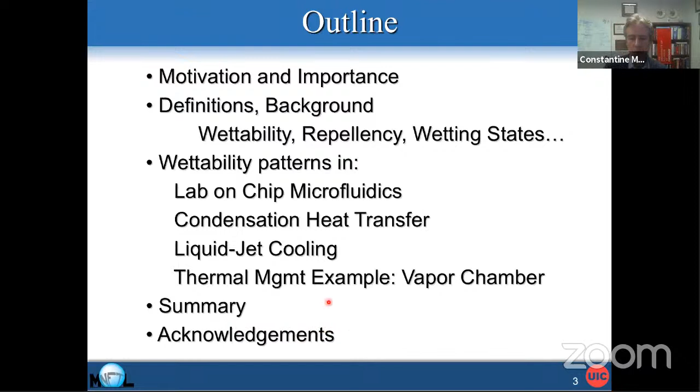And just to give you the background here about the effect of wettability, which is really the affinity of a solid surface to be wetted or covered by a fluid, is indicated here. This affinity is quantified in terms of the contact angle, which you see here.

If you have a small volume of fluid and you let it sit, this is the sessile contact angle, we call it. The equilibrium angle formed at the triple phase contact line - liquid, gas, and solid - designates the wettability of the surface. Small values of theta indicate high wettability. Large values of theta, in the sense that you have a ball, a basketball, let's say, sitting on top of the surface, indicate low wettability.

So for low values of theta, or high wettability, when you have a small amount of fluid, a droplet in that case, impact on the surface, the outcome is this. If you go to, let's say, neutral wettability, where theta is about 90 degrees, and do the same thing with nothing else changed, the same liquid, in this case water...

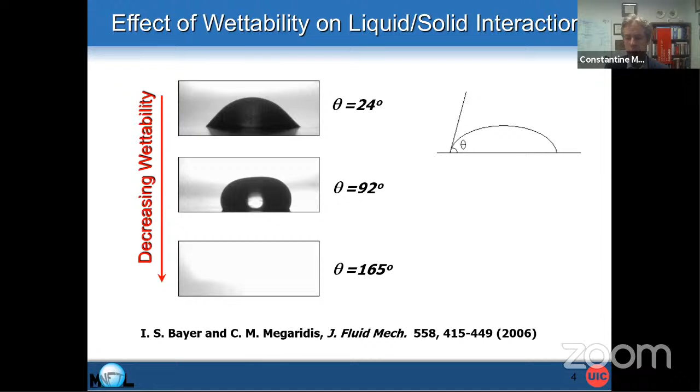So let's see how you can use this different behavior of liquids when they encounter solids to do certain processes and create outcomes that are useful in microfluidics or energy applications and so on.

So I'm going to talk about open surface microfluidics. This is our area of expertise here, and I understand a lot of that is also happening at IIT Madras in your group. We're going to concentrate particularly on pumpless rapid fluid transport.

Pumpless in the sense that it's not gravity driven, and rapid in the sense that it's not centimeters a second, but rather of the order of tens of centimeters a second, up to half a meter a second. These are almost like convective velocities caused by manipulating wettability on a surface.

Now, when you look at how a small droplet sets itself when we place it at the start of a wedge track—in this case a triangular wedge track—we're looking down on this droplet, so this is a top view. The dashed lines indicate the wettable domain, and everything else outside is a non-wettable domain.

The droplet itself, before it actually assumes this shape, is on the order of about 2.5 millimeters, which is below the capillary length of water. Why is that important? Well, when we have volumes with characteristic scales below the capillary length, gravity is not at play, or at least it's not important—it may be present, but not important.

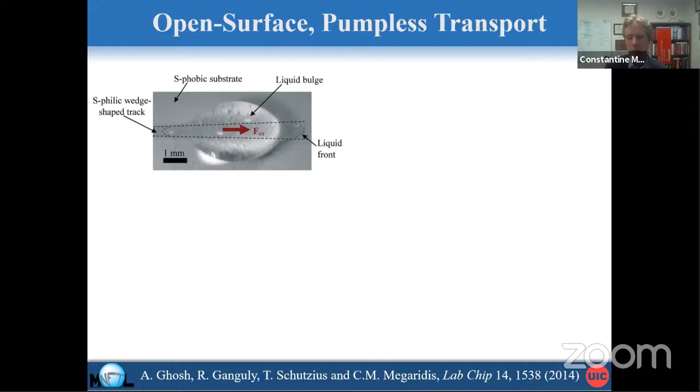So as we release this droplet at the narrow end, this droplet is in fact experiencing a force that is pushing it from the narrow to the wide end. I'll go into specifically why that is.

When you look from the top, you have these contact line forces, and because the droplet itself is spilling over and forming a cross section that looks like this, because of the shape, you have a composite force that in fact pushes the droplet from the narrow to the wide end.

And of course, when this configuration—this cross section—becomes that, things are slowing down because the forces are in the opposite direction, and then hemi-wicking also becomes important. So overall, the droplet deposited on a wedge track that is wettable and surrounded by a non-wettable domain is being pushed from the narrow to the wide end.

And with this analysis, kind of a back-of-the-envelope type of analysis, when you look at how this pressure gradient along X—this is the direction of propagation—it varies with the surface tension of the liquid, the average contact angle formed by the fluid spilling over at that contrast area, the wettability contrast area. Alpha is the angle of the wedge, and delta, depending on exactly where—at what X you're at—is the width of this track.

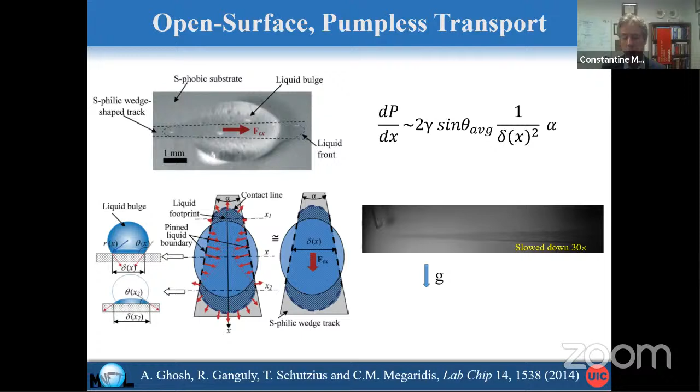So these are not velocities, hemi-wicking velocities through, let's say, a paper towel or a porous medium and so on. Now what can you do with something like that? Well, this is a depiction of a wedge that now is on an inclined path.

This wedge is depicted when you release it at the narrow end. Because of this force, it will be going upward, you'll see that in a minute. In this particular configuration, you bring the droplets, after releasing them at the low end, all the way up to that pad.

Of course, you're starting with energy that comes from the spherical shape and surface tension of the droplet, like a membrane of a balloon that squeezes the interior contents. As you allow it a way out, along this track, the liquid is pushing itself up because of that original excess energy. Eventually, when it becomes flat, that energy has been converted to potential energy, right? You went from here to here. So there's a limit to how long you can raise those.

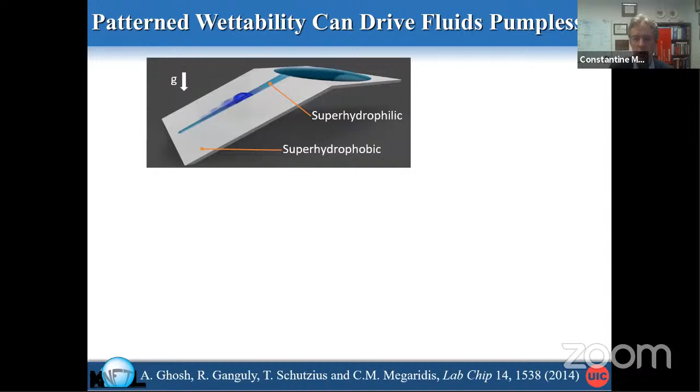If you do this simple calculation with a 2 millimeter diameter, again below the capillary length, you can calculate that it can rise up because of this surface energy to about 15 millimeters, because of other losses, friction losses and so on. But the theoretical limit itself is actually 22 millimeters, about 2 centimeters, but of course you can never achieve that.

Now when you implement that in practice, on the left, as you see in this panel, you have the syringe that dispenses colored water, dispensed at one point of this inclined ramp that you see here.

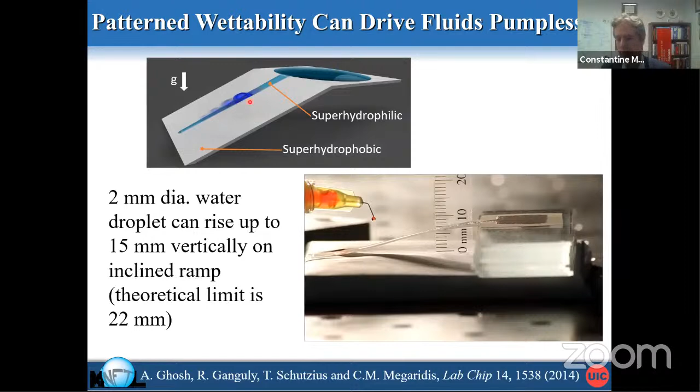Look what happens when we actually start dispensing droplets one at a time. They will start rising and go up here on the pad. This is what you see here, in real time. This is again red dyed water, and you can see how it rises against gravity. Gravity is pushing down, and you can see how the droplet falls with gravity.

This gravity contribution, by the way, is very small, just a few percent of the energy compared to the Laplace pressure in the droplet. And you see how eventually you can get tens of those droplets up on this pad.

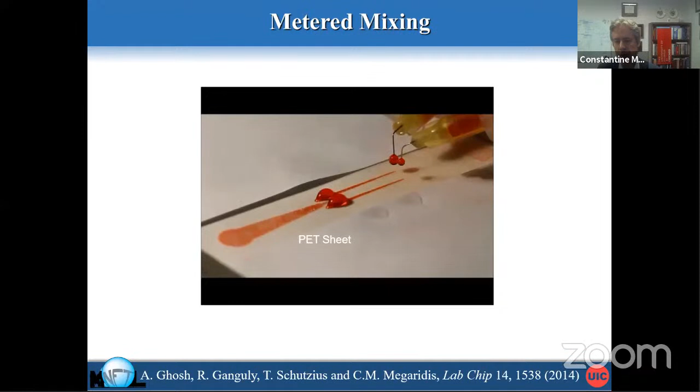So let's see then, in that particular case, what happens when you actually do this in real time. You see the droplets becoming large, they eventually merge together, and it's always happening the same way.

And you can see, you can repeat this many times. Gravity is normal to the paper, to the plastic sheet right here, and you see a tremendous amount of fluid that is actually trapped by the wettability confinement.

As we move on, I want to show you a slide that looks busy in the beginning, but I'll orient you. This is the schematic of what is depicted here. We have two wedges, A and B. They're a little lighter in color than the surrounding area, and this is the wettable area. Both A and B are wettable, and they extend to the beginning of C, which is this right here—that third staggered track. The interesting part I want you to pay attention to is the presence of this hydrophobic island, which is this one right here. That hydrophobic island does not want to be wetted by the liquid.

These are, by the way, two different liquids, both aqueous. They're salts that react together, and when they react, they create a dark color that shows you the degree of mixing. The darker the blackness of the fluid after mixing, the better the mixing. So this is qualitatively how we evaluate the degree of mixing. These, by the way, are millimeters, so this is a centimeter. You're looking at something on the order of a few centimeters.

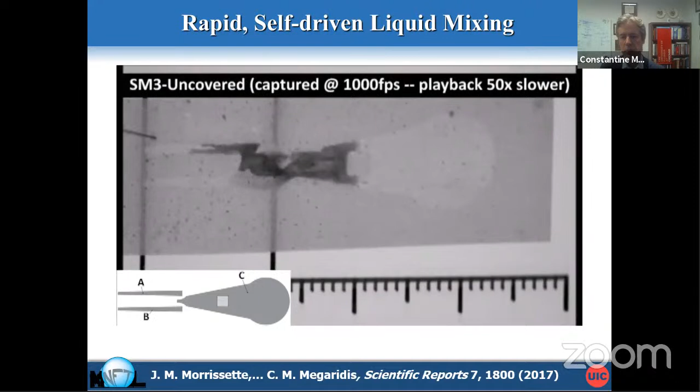Now as I play this video, I want to point your attention to the left. You see the needle at the top left, and when the droplets are released, they react. You have the mixing, and over the island you see how the drying occurs. This is drying because the surface repels the liquid. I'll play it again so you'll see some pumping action behind the island—this wake action actually improves the mixing of the two liquids, and the mixing time is far shorter than when you had diffusion alone.

So you get the idea, and then you can do quite fancy things. In this case, let's say you have an overpass in this fluid—both of them are water droplets. We're going to have a path kept up by a block that goes over the path the green droplet is going through. As I play it, these are millimeters—this is one centimeter, two centimeters, and so on. You'll see an overpass where the red liquid goes over and the green liquid goes under.

And here it is, in real time. You bring the green all the way closer to the viewer, let's say, and the red all the way from the right to the left. So you can do either straight paths or curved paths.

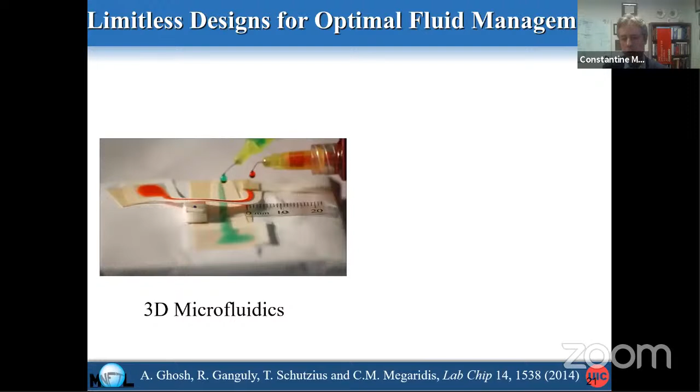Or 3D microfluidic tracks and so on, but you can also do spiral paths. In that case, the spiral is on the order of about 20 centimeters or so. When you dispense a droplet right after the start, you can see that flash—that's the impact of the droplet—and you see how that liquid advances.

So there are a lot of things you can do and manipulate in microfluidics, the kind of stuff you may be doing for building devices—devices that aren't applied to just one type of substrate, but many different substrates. It can be metal, it can be paper, it can be plastic, it can be glass.

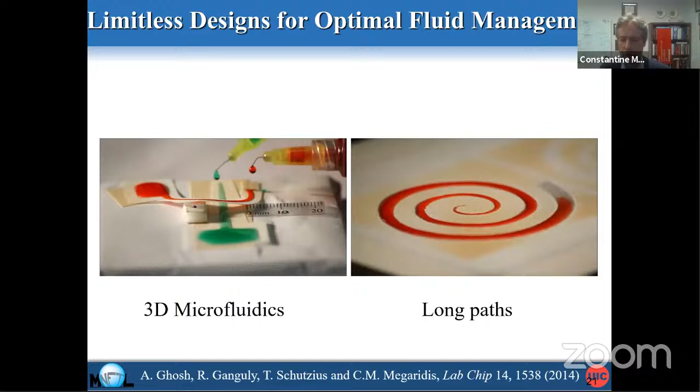Now as we look at what you can do with this type of configuration when you have non-aqueous liquids—let's say you have an oil—you need, of course, to create repellency to the oil, and we all know that's not easy at all. We have a formulation we created in collaboration with the US Air Force at Edwards Air Force Base. The chemists there involve silicon cage compounds, POSS compounds. It's not critical at this point how we make them, but what's important is that you can also have non-aqueous liquids with lower surface tensions that undergo the same type of movement.

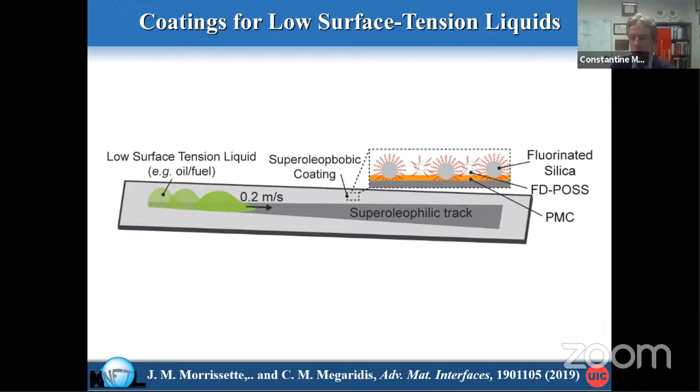In that particular example I'm showing you, you'll see different bands of liquids starting from the top where you have water. The next one is a hydrocarbon, maybe kerosene, all the way down to decane, where the surface tension is 23.8 dynes per centimeter.

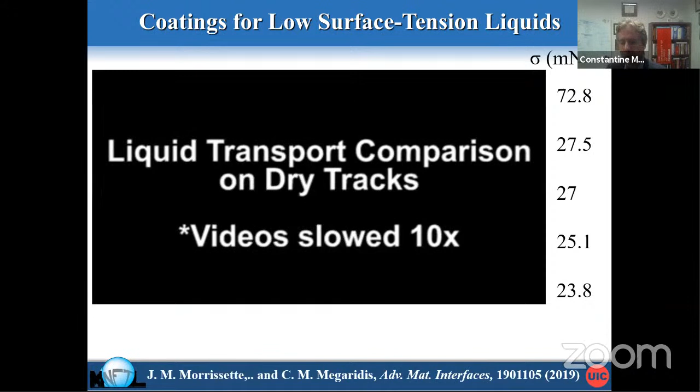As you go to a lower surface tension, it becomes a lot more difficult to repel those liquids. But I'll show you the outcome of this published study, where you have these tracks, slowed down by 10x, from water to hexadecane, kerosene, and dodecane. You see the droplets on the left, and how the front progresses to the right, with velocities that are quite significant—in this case up to tens of centimeters a second.

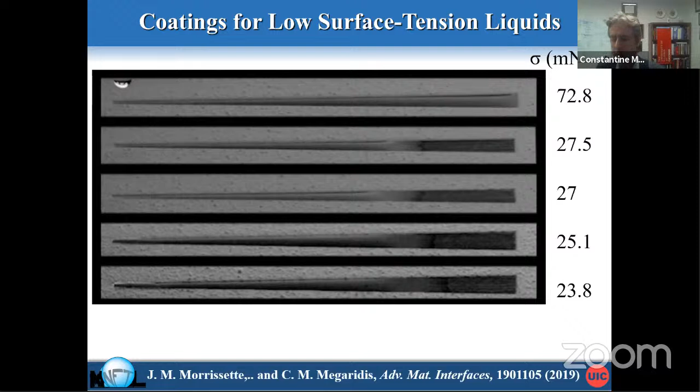We've recently also been able to create something similar with octane, which is in the very low 20s for surface tension. To the best of our knowledge, with this type of sprayed coatings and wettability patterns, octane has not been done so far. We're not talking about surfaces repelled with highly sophisticated, lithographically made, expensive surfaces—we're talking about something you can spray and pattern.

Now, as we look at the physics of this, if you look at the advancing rate of the fluid and how it progresses as a function of time, this is versus viscosity of the fluid, which we tested with glycerol and water solutions. You see that the rates, of course, are not the same.

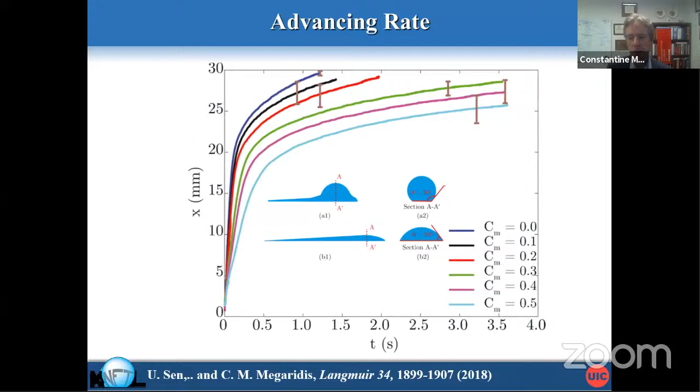However, if you look at what is driving this type of physics and movement, and look at non-dimensionalization—you non-dimensionalize the front, the length where the front of the droplet is, with the total length of the track, and then scale the time with respect to the viscosity and surface tension of the fluid. Interestingly, density does not come into the picture here, possibly because the density ranges we looked at were not that wide. But what is important is that you have three distinct regimes.

You have a hemi-wicking regime right here, where Laplace pressure has not yet kicked in—this is the area that is blown up here. All these curves collapse into one. Then you have a second area where Laplace pressure is actually countered and balanced by the viscous forces, and that's why you have dx/dt constant—the velocity is constant. Then you have a third regime where dissipation and viscous forces take over, and dx/dt is much, much lower. So the flow slows down here.

Nonetheless, you're able to see that there is a scaling law you can use, with the exception of density—as I said, the density variations we used were not very large, on the order of about 20 or 30%. But if you go to a ratio of 2 or 3, things may change. Nonetheless, the scaling law allows you, for fluids with known viscosity and surface tension in this type of system, to predict how a droplet would behave on a wedge, given its surface tension, viscosity, and the length of the track.

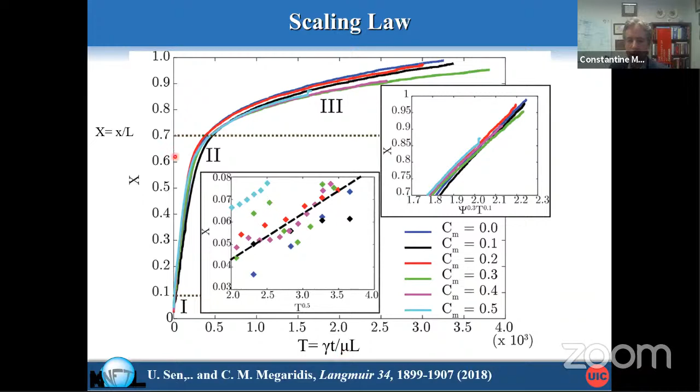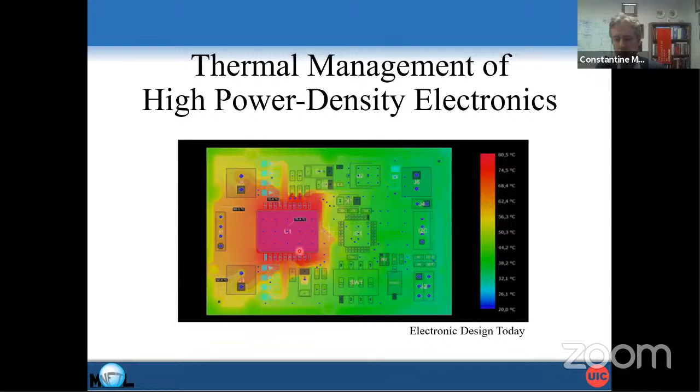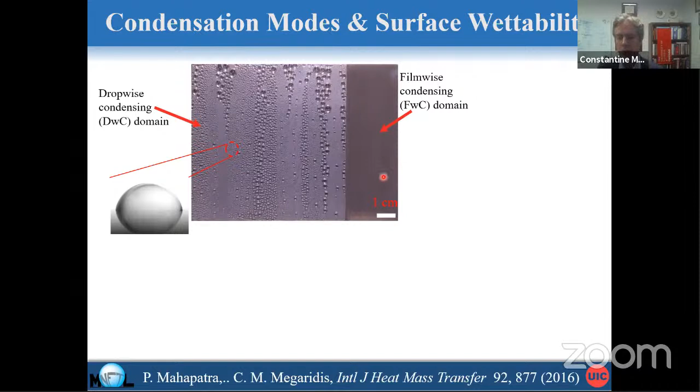Here we enlist the physics and thermodynamics of condensation modes. You have dropwise condensation, which is very efficient in heat transfer. Then you have film-wise condensation, which is not efficient, but is good at allowing you to remove the condensate. You see how the liquid deforms in the dropwise condensation configuration versus film-wise. Because the film covers the cooled wall, it insulates what's happening on the wall from the ambient, which slows things down.

That's why when you compare this to this, the heat transfer coefficient for dropwise condensation is far better than filmwise condensation. So you want to be able to have efficient dropwise condensation.

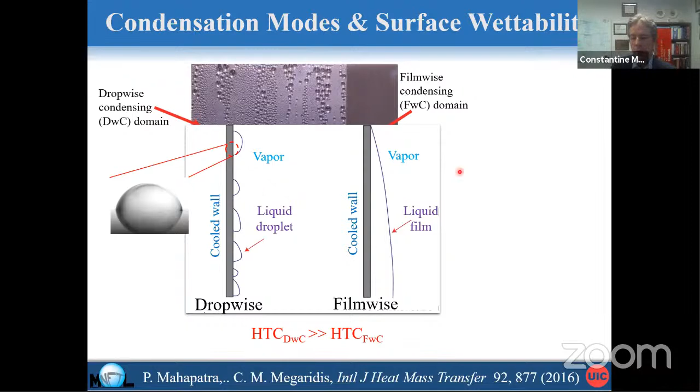When you look at how one can achieve that, it turns out that when you remove the condensate droplets at lower size, so you don't allow them to become very big, the dropwise condensation heat transfer becomes more efficient. I display here a series of bands of dropwise and filmwise condensation domains. We have dropwise condensation here, and this is a continuous film of this condensate, water in this case, indicated here.

By manipulating and tuning these bands, not in real time but in advance, you're able to allow these droplets to become only as large as the width of the dropwise condensation domains. When you do that, these droplets eventually bridge and get sucked into these paths right here.

That's what I'm showing you in these two videos on the right, where you have the dropwise condensation and the filmwise condensation. Let me show you again with the laser pointer: dropwise condensation, filmwise condensation. Filmwise is right here, dropwise is right there. I'll play that in a minute.

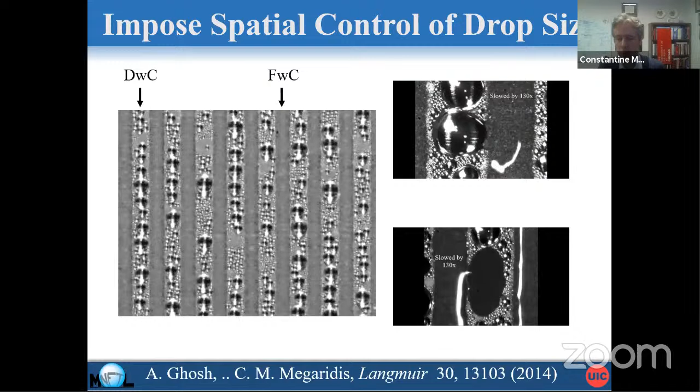As we go on, this is work that Dr. Mahapatra actually did in the lab here when he was around.

You're looking at these rake kind of patterns. The dark domains are the domains of high wettability, and then when droplets in the less fluidic domains, which are the dropwise domains, get big enough, they get sucked in by these wedges, and then drawn into these veins and moved to another part where you don't have to worry about interfering with the dropwise condensation.

This is a sequence, slowed down, showing a forced situation where we leave a droplet at the end of one of those wedges, and you see how it's directed towards the wide part of the wedge and then into the main vein that you're looking at here.

So the strategy here is to use dropwise condensation and filmwise condensation domains to enhance heat transfer. Of course you have to optimize, because one works for you in terms of drainage - the filmwise condensation facilitates drainage - but filmwise condensation works against you for heat transfer coefficient, while dropwise condensation works for you.

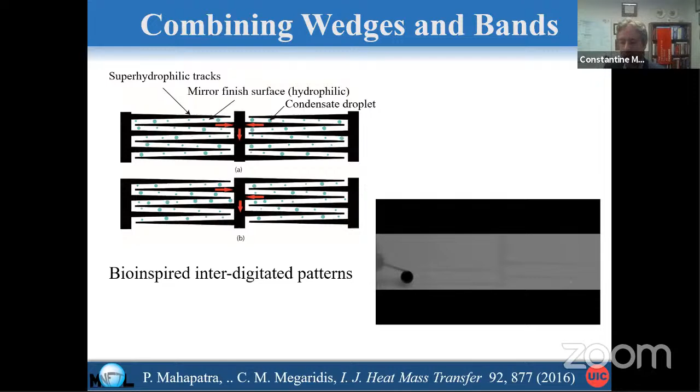In this particular case, you see this implemented in a real application, where you see popping events with these droplets. When they become large enough, they eventually get sucked in and go down these fluid-filled veins, and eventually the condensate drops from the bottom.

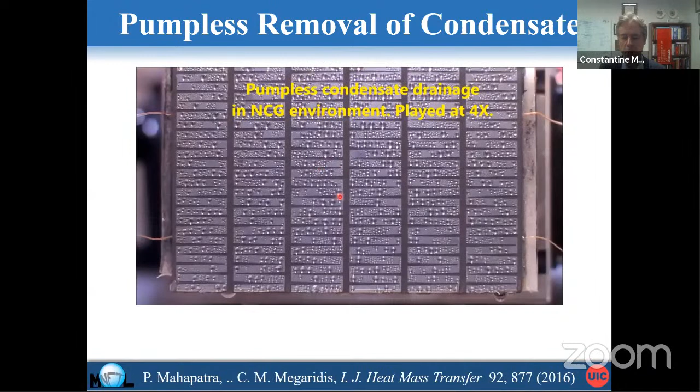This is in the presence of non-condensable gases. If you had a pure steam environment instead, these improvements would be much higher.

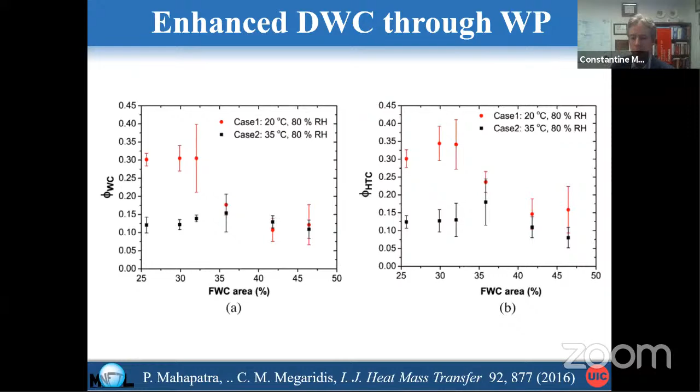Liquid jet cooling, that's the third application I'm going to talk to you about.

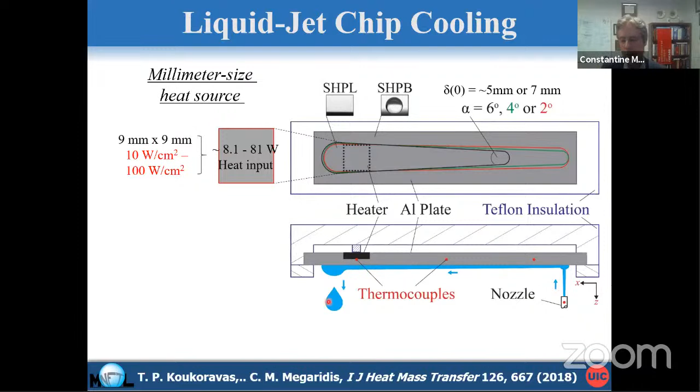So how is that happening? Well, the incoming flow is coming from right to left. This is the hot domain right here, and you see as more and more fluid comes in, eventually this accumulates and drips down. When you do this, I'll show you the video here as it's seen from the side.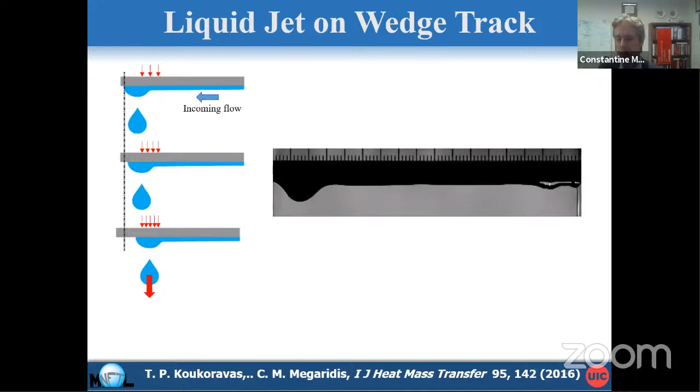This is where the jet is striking, the jet is moving from right to left. Again, if you looked at it from the bottom up, you will see the triangular path. This is a narrow path that gets wider and wider, and as you get more and more liquid here, eventually it drips off. The hot domain is right here, and that hot domain is kept cool by the fact that this liquid film is driving over it.

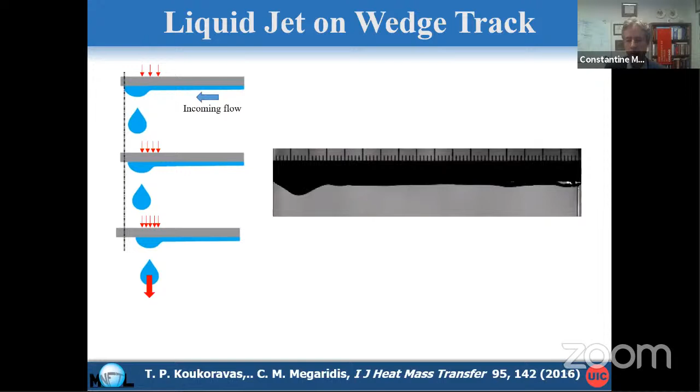Now there are interesting things here related to a single versus multiple of those tracks. When you look at the height of this film and the width of that film as it propagates from the narrow to the wide end, you can do simple heat transfer manipulations. The heat transfer depends on Reynolds number and Prandtl number, and then the width of the film thickness, and then a constant. And then you, in fact, have 2 possibilities: a single track versus multiple tracks.

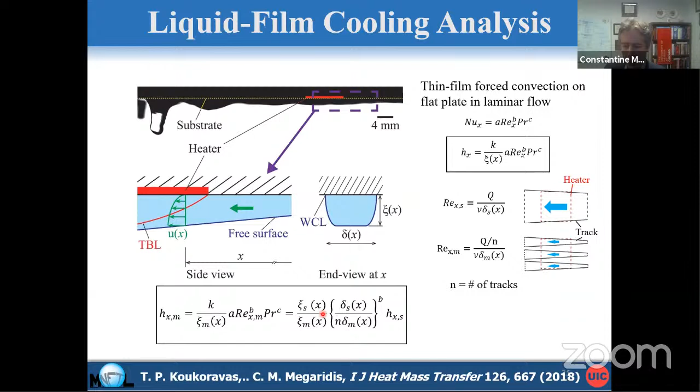I'll show them in a minute. The multiple track heat transfer coefficient is compared to the single track heat transfer coefficient, but there's also this multiplicative factor that can be quite a bit larger than 1. So if you play your cards right, this is the width of the single track, for example, and how it compares to the number of tracks multiplied by the width of the multiple tracks.

So these are smaller tracks, then this ratio, you can make it larger because remember, this is the width of the single track, and this is n times the width of multiple tracks, and this product here is generally smaller than that. So this is larger than 1, and because of that exponent, this is a larger than 1 factor.

Now if you also compare the thickness of the single track to the thickness of the multiple tracks, this is much, much smaller than the single track, so again this is larger than 1. So if you take these factors together, you have a coefficient that is larger than 1, much larger than 1, and it multiplies the heat transfer coefficient of a single track.

That tells you that if you use multiple tracks, you have a much better chance of cooling the same spot with less liquid. And that's what I'm going to show you here.

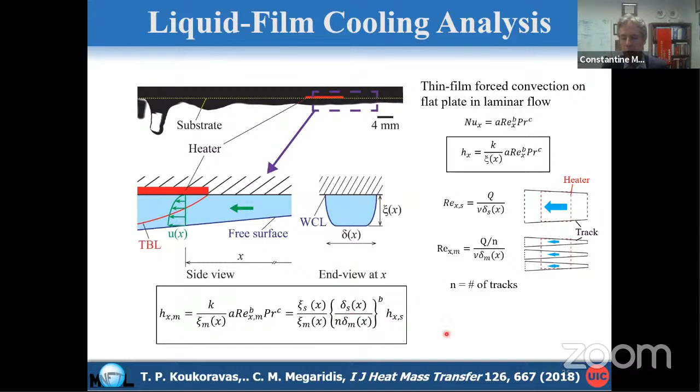This is how you implement the cooling of this particular hot spot. You have 2 jets that are coming in, these are the narrower tracks that we have, again triangular, and you see the single track width is this. I'm sorry, the multiple track width is this.

You see the red dot right here, that's another one up there, another one down there, and so on. We have 4 of them. Now, for the same reason I showed earlier, because the heat transfer coefficient for these thinner films is so much higher, you get the benefit of having to slow down the jet here, so you use less of the coolant. I have some numbers here that indicate the number of tracks, how these widths and thicknesses compare with one another.

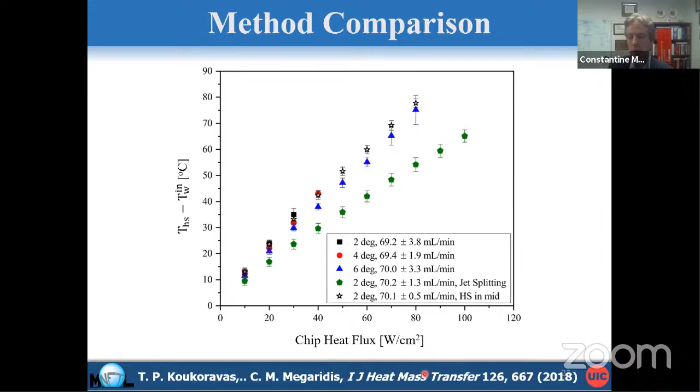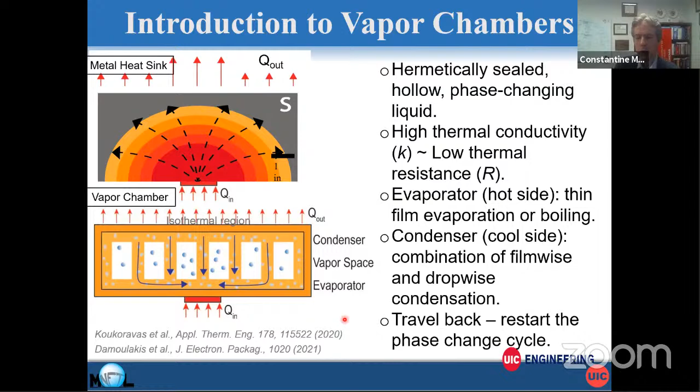But these kinds of devices, the vapor chambers with these wick structures, have some limits—capillary limits and so on. What we wanted to do is try to eliminate those with wettability patterning. Instead of using these wicks that are limited by the speed they can move the condensate and the distance they can move it, the velocity of wettability pattern surfaces is bigger than that of the wick, and the length you can transport the condensate with wettability patterns is larger.

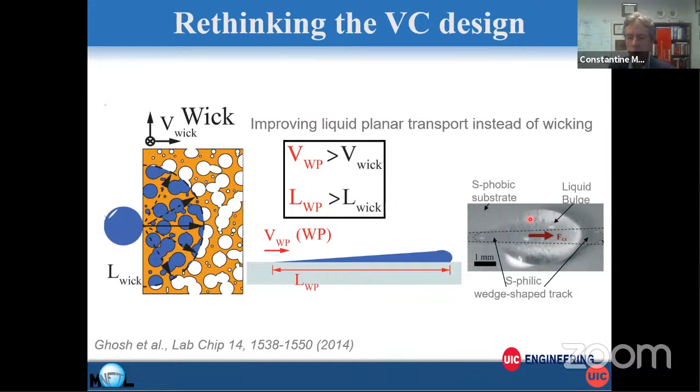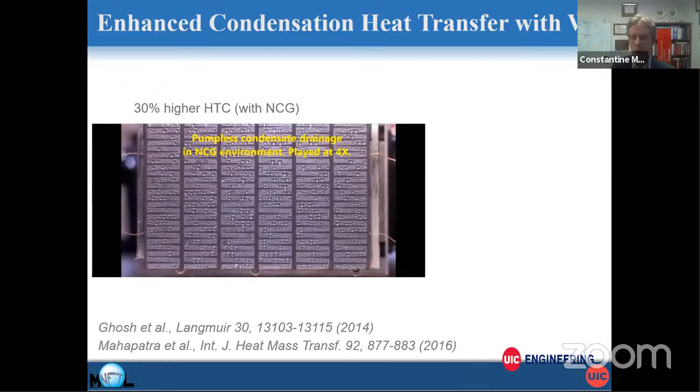So with these advantages, what did we do? We put it to use. We use this type of surface where we have wettable regions in a non-wettable background to move the condensate in a vapor chamber very quickly. This is the principle I showed you earlier, of using this wettability pattern to move the liquid from dropwise condensation to film-wise condensation and then away from there. This is the principle we use on the condenser of the vapor chamber.

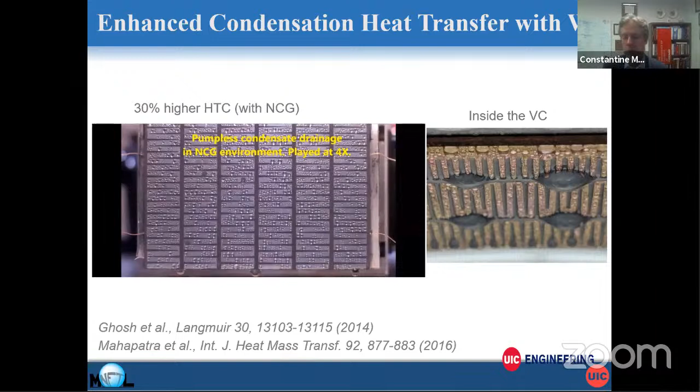In practice, this is how the vapor chamber condenser looks like. You see how these ribs are implemented and how the liquid is now accumulating at these pools. When you do that, you have the ability to bridge to the other side. So this is how the vapor chamber works—this is the evaporator for a single hot spot in the middle, and you have the evaporation from here. Black indicates wettable, shiny indicates non-wettable—not super non-wettable, but just non-wettable, for dropwise condensation.

When this happens, this is actually the evaporator—you evaporate from here, and the condenser is facing down. This is kind of open, like a toaster—a kitchen toaster, you know—that you've opened in a way that you see how those two mate with each other. This is the condenser.

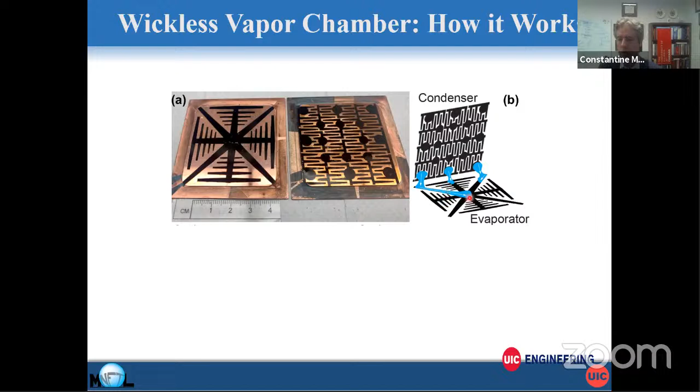This is the condenser, this is the evaporator. The evaporator is depicted here in reality, and the condenser is depicted here in reality. When you imagine this, you hold that hinge, and then you lower this down, and that closes the vapor chamber. Now you see the evaporation occurring from the hot spot right here. The vapor goes and condenses, and because of these patterns it accumulates at those pool areas. After it becomes big enough, it bridges and connects with these star ribs right here, and the condensate returns to the circle. That process is perpetuated. So that's what I said earlier.

The heater eventually heats up and evaporates the liquid. The liquid condenses on the other side at specific domains, these pools that I showed you here. Then when they become big enough, this accumulated fluid there, the volumes, they bridge, and the whole thing happens again and again. So how important is this?

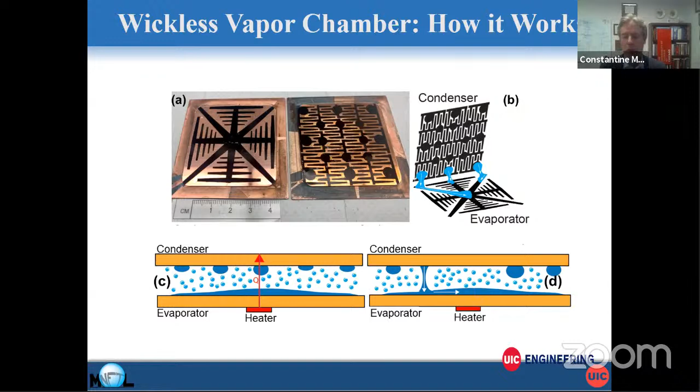It's quite important in the sense that you have the thermal resistance, and that's a critical quantitative metric to measure one against the other. This is how a fully wick-lined vapor chamber looks like with the post right here. This is the condenser, this is the evaporator.

When you have this wick-free vapor chamber, totally wick-free, with no wicks at all, liquids are moving much, much faster in there because of this wedge pattern and Laplace pressure type of influence. You see how the wick-free vapor chamber has a substantially lower thermal resistance than the conventional fully wick-lined vapor chamber. These are not the best values, neither for the wick-lined chamber nor for our wick-free chamber, but the trend is maintained.

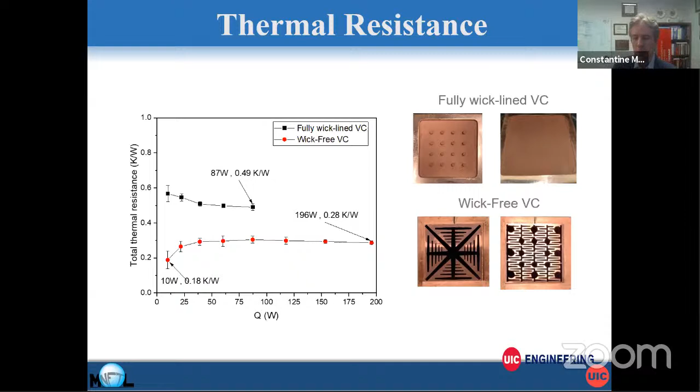So what you've done here is actually created a device that can enhance, create a new level of technology for vapor chamber heat spreaders. These spreaders also behave as thermal diodes, but I'm not going to go into this.

This is benchmarking how good our devices are. You want to have them small enough and with high enough power. This is the effective length - the lower, the better. We're pretty good. This is the UIC technology compared to others - GE, UCLA, University of Colorado, Raytheon, and so on.

To be fair here, these are data from 2015, and these are data more recently from us. But just as a benchmark, the scales we are dealing with are quite small, and the powers we can handle - the red here is the heat flux. This is the heat flux, for example, here. That's the one that is again quite competitive - you see it's among the highest. This is the highest, of course, and that appears to be the smallest, which is the greatest, and the highest power. That's also the greatest from all those, but we're pretty competitive.

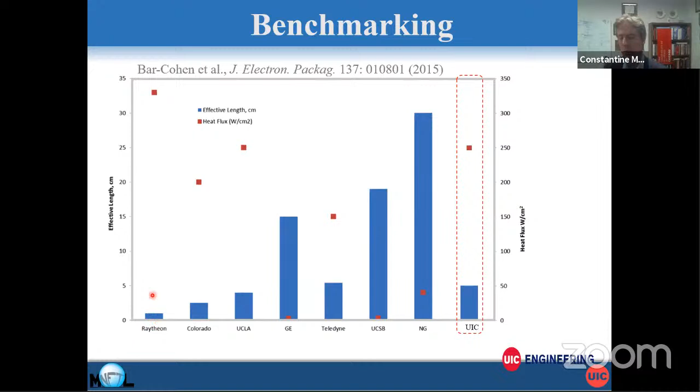Now, when it comes to benchmarking power versus thermal resistance, you want to have the lowest thermal resistance as possible - that's the blue diamond right here - and the power needs to be as high as possible, the red bar. So again, we're pretty competitive compared to other technologies.

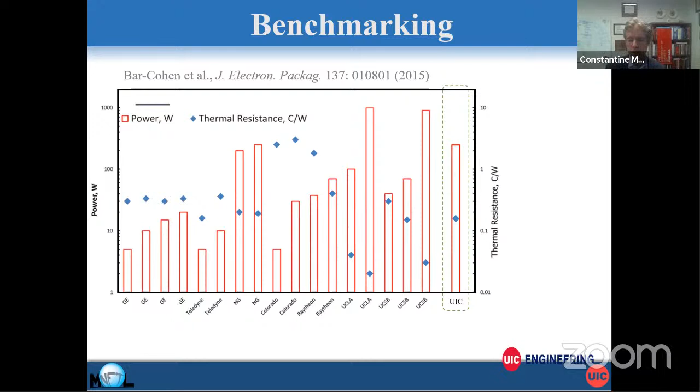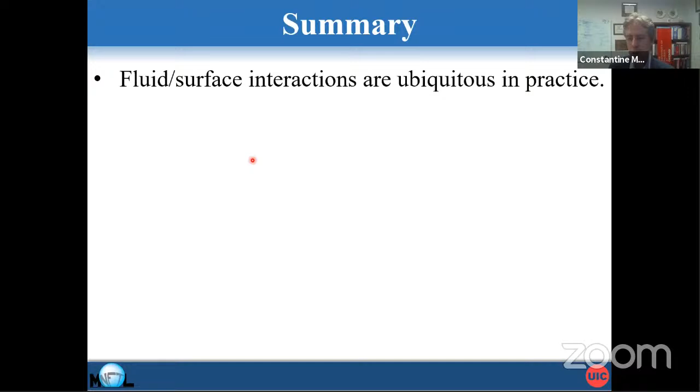I don't want to spend much more time on this. What I think is important to summarize here - I gave you a summary of how fluid surface interactions are ubiquitous in practice and technologies that range from microfluidics to heat transfer. I also presented some applications of surface wettability engineering, which is very well suited for managing liquid transport in applications ranging from microfluidic devices to condensers, vapor chamber heat spreaders, fuel cells.

Environmental sensors, liquid-oil-water separators, and so on. And then, of course, that's the reason you have created the group there - challenges abound. There are so many of them, and it's so critical that actually limits the technology, that a center of that sort is an excellent choice, I think, for a young group of academics in a very dynamic institution.

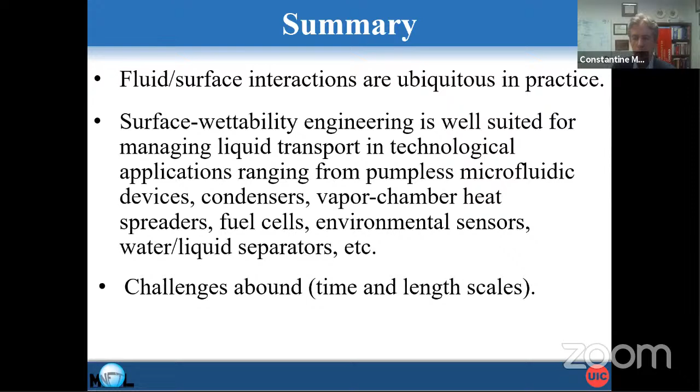So as I wrap up my talk with acknowledgements, I had the benefit and privilege to have many people from all corners of the world, and many of them from your country, some of them now professors in prominent schools. Manish is at UCL in London. We have Tom Schutzius, who used to be an assistant professor at ETH in Zurich, and others who are actually around US industry. And of course, postdocs and visitors - Professor Ranjan Ganguly, who's in the audience, a great friend and colleague. Palab, of course, Mahapatra, who's a professor there.

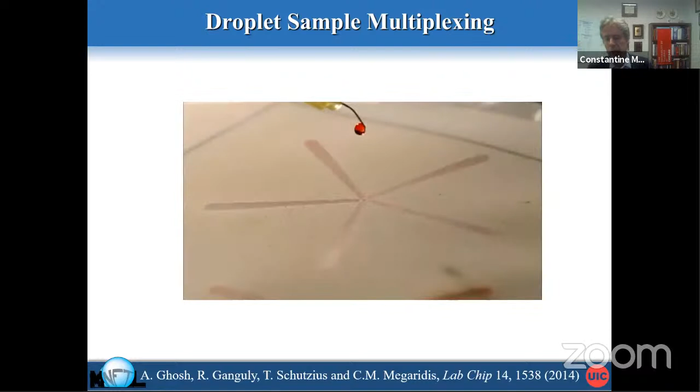Everything that winds up at the edges of these tracks depends on how big the droplet is, how many tracks you have, and how long the track itself is. When you do the multiplexing, you have a volume of one splitting into five. As you see, with one droplet alone, you didn't reach the end—you have to wait quite a bit. With the second one, you go further and further.

If the spokes were half the size, you could have done it with just one droplet. In this particular case, you needed about three droplets to go all the way to the end, where the reagents for colorimetric detection are located. So it depends on many things: size of the droplet, number of spokes, the angle of the wedge, and the length of the wedge. All of those have to come together to allow the measurements you want. But this is for statistical measurements—you'd create multiples of the same setup.

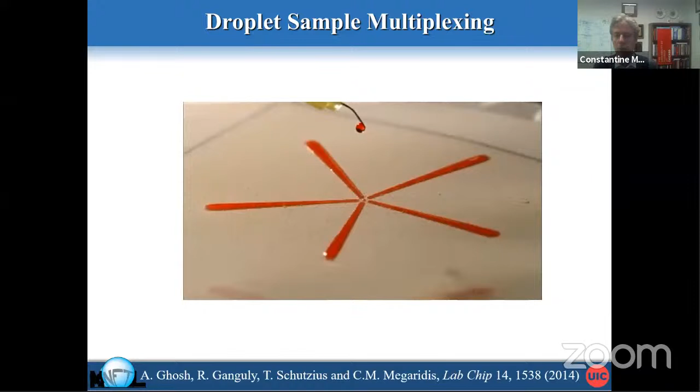Thank you, sir. Oh, you're welcome. I think we need to wrap it up. Yeah, people are going. Okay, thank you. It was a great talk.

Actually, this was the first talk I attended that Professor Megaridis gave. Wonderful—I haven't seen him presenting before. It was such a lucid presentation. You've seen the students and so on, and it's so fun to present one's work. That's what we do, that's the only thing we have in life, really. We work and produce things that a lot of people don't care about, so when other people appreciate and enjoy it, it's even more enjoyable for us, like Ranjan. That's the point.